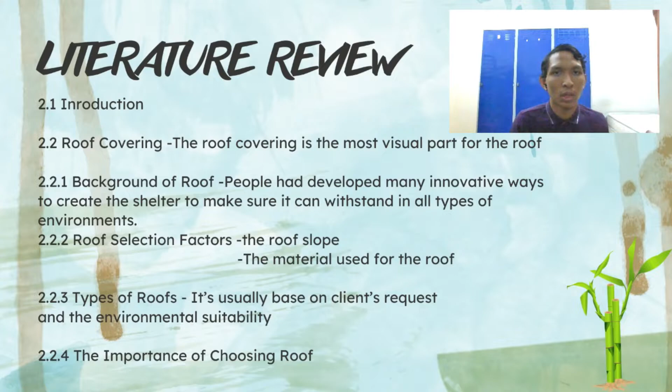Okay, so next is the bamboo background. We talk about bamboo as the fastest growing plant in the world. We also talk about the texture of bamboo that makes it very durable as a construction material.

So next is the bamboo selection factor for roofing. We use bamboo as a roof because it is lightweight, fast growing, and has strong durability. This element shows that bamboo works well as a roof. It is lightweight, which shows that bamboo is easy to install.

Next is the fast grow factor, which shows that the material is easy to get, and strong durability, which shows that it can sustain for a long time.

Next is the type of bamboo available in Malaysia. There are 59 species of bamboo in Malaysia, consisting of 7 genera, such as Bambusa and Dendrocalamus.

So next is the importance of bamboo to be used to make a roof. We use bamboo to make a roof because of the factors stated earlier - bamboo can sustain for a long time and is easy to get. It also costs a lower price than other materials.

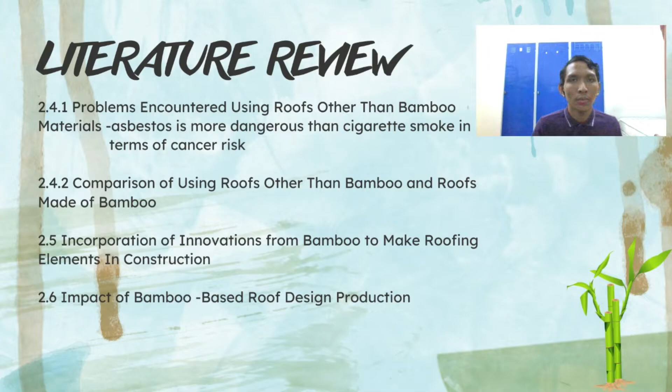By giving the bamboo some treatment, it can make the bamboo sustain for a long time to construct a better roofing. Next is the impact of bamboo based on roofing design production. By using bamboo as a roofing material, we can make many new designs of the roof, and also the roof can sustain for a long time as needed.

Thank you for the previous presenter. Now I will present about the methodology in the final year project of my group.

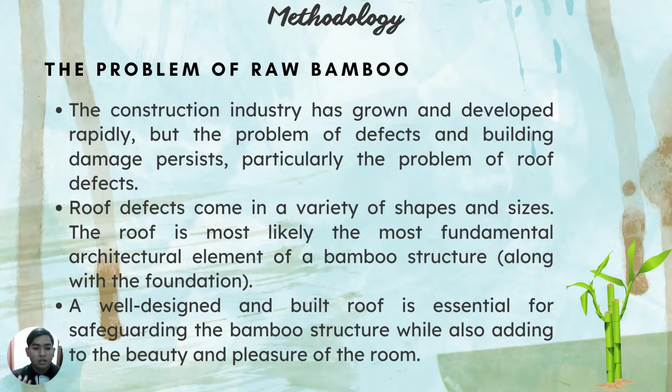The problem of raw bamboo: the construction industry has grown and developed rapidly, but the problem of defect and building damage persists, particularly the problem of roof defects. Roof defects come in a variety of shapes and sizes. The roof is most likely the most fundamental architectural element of a bamboo structure, along with the foundation. A well-designed and built roof is essential for safeguarding the bamboo structure while also adding to the beauty and pleasure of the room.

Next I will talk about bamboo treatment. What is bamboo treatment? Bamboo treatment is a process that removes the starch, sugar, and moisture content of bamboo, making it resistant to termites, fungus, and bugs.

Bamboo has been treated in a variety of ways for many years, including traditional methods such as torching, smoking, curing, and whitewashing, as well as more modern methods that use various chemical treatments. Based on our research, the thickness of bamboo required to make a roof is 35 to 40 millimeters, which means thick bamboo should be available for use as a building material, particularly for roofs that will be exposed to summer and rain as well as changes in ambient temperature.

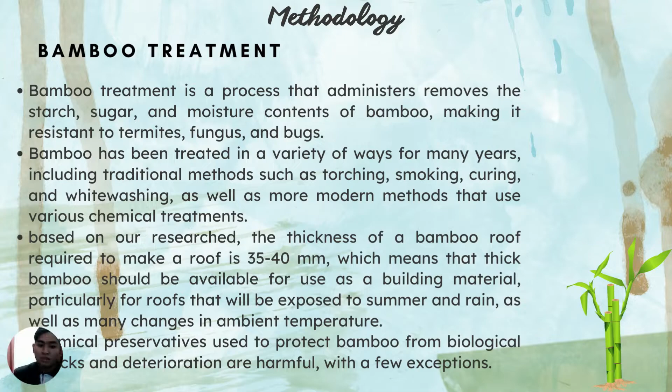Chemical preservatives used to protect bamboo from biological attack and deterioration are harmful, with a few exceptions.

Boron salts, which are effective against borers, termites, and fungi, are the main component of non-fixing bamboo preservatives. Water is used to dissolve these boron salts. The water evaporates after treatment, leaving the salts inside the bamboo. They are non-toxic and can be used to treat bamboo products that come into contact with food, such as baskets and dry containers. Disodium octaborate tetrahydrate, Na2B8O13 times 4H2O, is an alkaline salt formed by combining boric acid and borax in a ratio of 1 to 1.5.

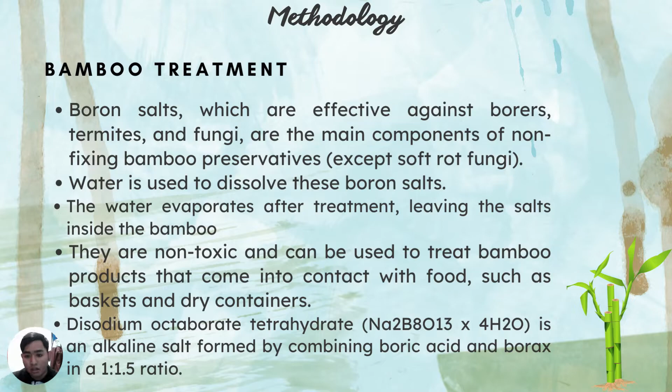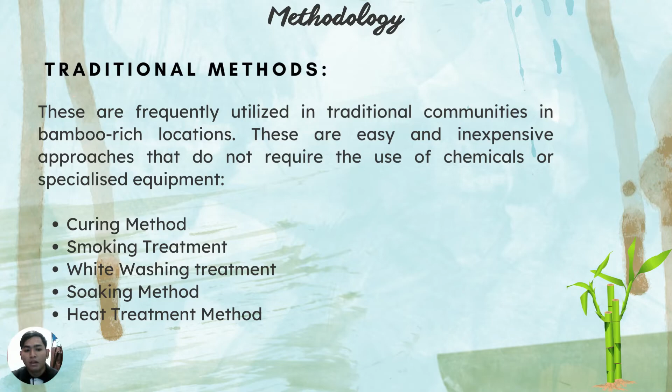The traditional method is frequently utilized in traditional communities in bamboo-rich locations. These are easy and inexpensive approaches that do not require the use of chemicals or specialized equipment. Examples of traditional methods include curing method, smoking treatment, whitewashing treatment, soaking method, and heat treatment method.

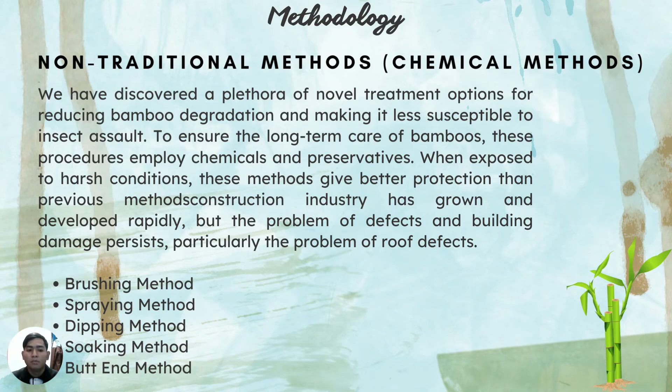Now the non-traditional method, which is chemical methods. We have discovered a plethora of novel treatment options for reducing bamboo degradation and making it less susceptible to insect assault. To ensure the long-term care of bamboo, this procedure employs chemicals and preservatives. When exposed to harsh conditions, this method gives better protection than previous methods. The construction industry has grown and developed rapidly, but the problem of defect and building damage persists, particularly the problem of roof defects. Examples of non-traditional methods, which are chemical methods, include brushing method, spraying, dipping, soaking, and butt-end method. Now I will show you pictures of all the methods I mentioned.